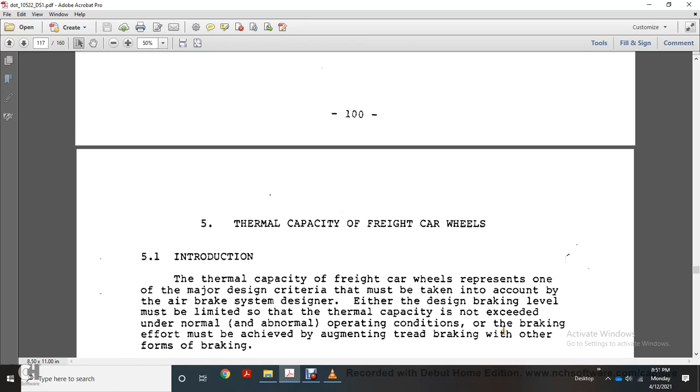Introduction. Thermal capacity of freight car wheels represents one of the major design criteria that must be taken into account in air brake system design. Either the design braking level must be limited so thermal capacity is not exceeded under normal or abnormal operating conditions, or the braking effort must be achieved by augmenting tread braking with other forms of braking. Several attempts have been made, especially within the past 20 years, to determine the actual thermal capacity of the freight car wheel typically found in service in North America.

This research has included experimental or theoretical approaches, with particular branches examining wheel dynamometers and performing various kinds of experiments.

Investigation of thermal capacity of the freight car wheels. The purpose of this section is to discuss the most significant portions of the research activity and present a collective assessment of the thermal capacity of freight car wheels.

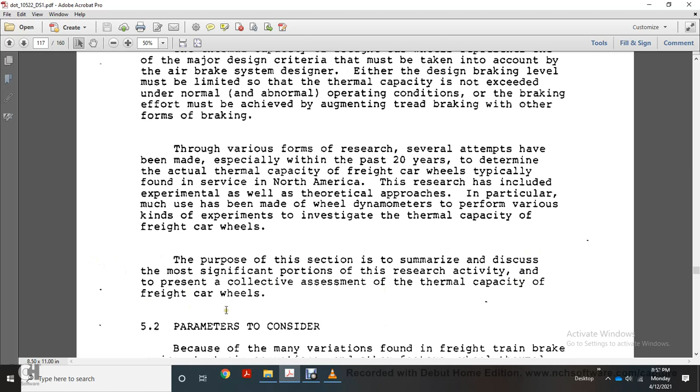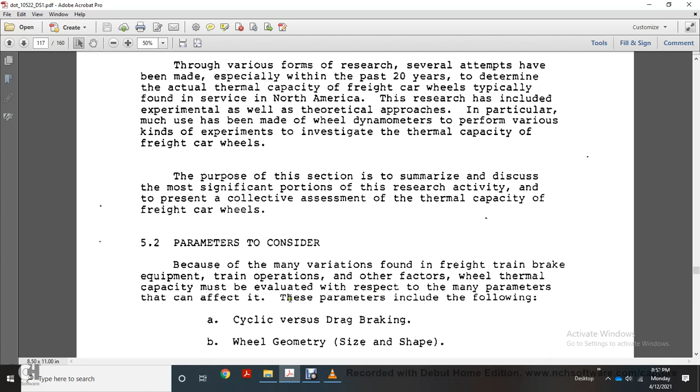Section 5.2: Parameters considered in the performance may vary with the freight train brake equipment, train operation, and other factors. The wheel thermal capacity must be evaluated with respect to many of these parameters. Parameters include the following: cyclic versus drag braking, wheel geometry size and shape, wheel material, heat treatment, and worn versus non-worn versus new wheels, brake shoe material, shoe alignment, and other considerations. Each of these topics is discussed in terms of the research efforts performed in recent years.

Cyclic versus drag braking. The thermal capacity will depend on the type of operation the wheel experiences. One term of cyclic braking is used by enginemen to control train slack action when operating long trains over undulating terrain.

Although brake levels due to this type of braking, also called stretch braking, are normally not large, the wheels are exposed to alternating cycles of heating and cooling.

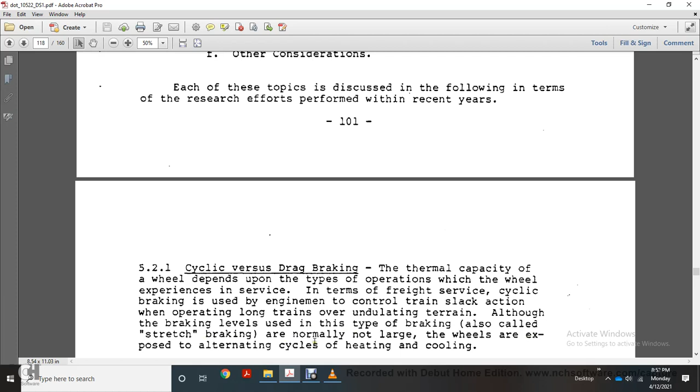Another form of braking that can be considered cyclic is the full service or emergency brake application, used when the engineer needs to produce a large change in train speed.

For example, going from 50 miles per hour to a stop causes the wheel tread temperature to increase to a high value over a short period of time, then drop back to ambient level at a rate determined by ambient conditions.

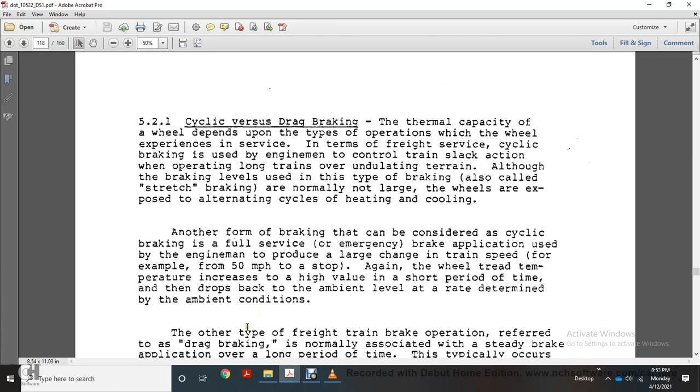The other type of freight train brake operation, referred to as drag braking, is normally associated with a steady brake application over a long period of time. This typically occurs when the train is being operated down a long, steep grade, where the train brakes are applied to balance the gravitational force of the grade.

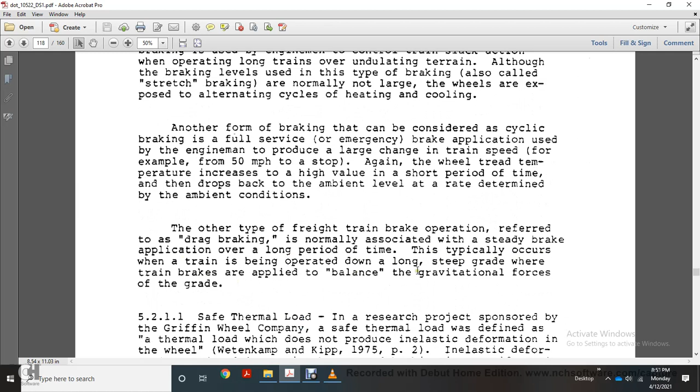5.2.1 Safe Thermal Load. This research project was sponsored by the Griffin Wheel Company. Safe thermal load was defined as the thermal load which does not produce inelastic deformation in the wheel (Wetenkamp and Kipp, 1975, page 2).

Inelastic deformation produced in service because of braking and manifestation of residual stress in the wheel, caused by a large variation of temperature between the wheel tread surface and other portions of the wheel.

This variation of temperature, referred to as thermal gradient, is believed by some investigators to be more significant in causing wheel residual stress than the equivalent or even higher tread temperature sustained for a long period of time.

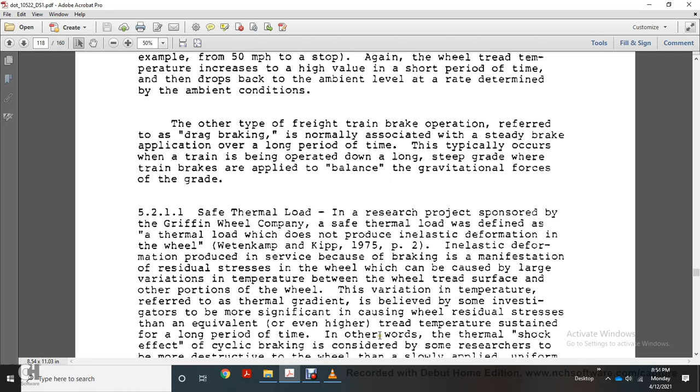In other words, the thermal shock effect of cyclic braking is considered by some researchers to be more destructive to the wheel than the slowly applied uniform high temperature brake application followed by a slow cooling process.

To place the thermal capacity of the wheels in perspective with respect to cyclic and drag braking applications, the braking level of both types of application must be known.

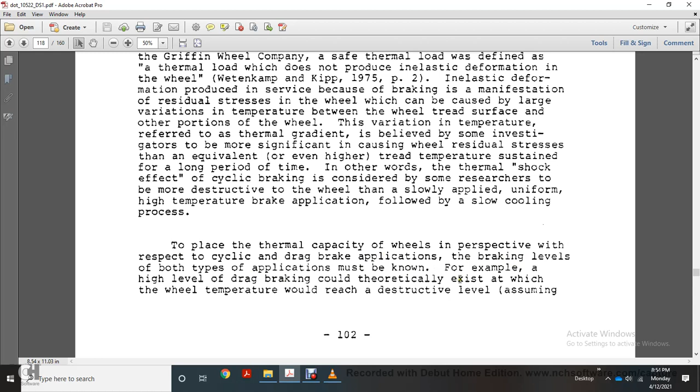For example, a high level of drag braking could theoretically exist in which the high wheel temperature would reach a destructive level—assuming the brake shoes did not disintegrate—and the wheel would fail, with the amount of cyclic braking not being a factor.

5.2.1.2 Recent test methods and tests conducted at the University of Illinois. Several types of wheel braking levels and cycles were investigated using a given wheel diameter. The residual stress of the wheel is measured after subjecting the wheel to various braking levels, by measuring the opening of saw cuts made into the wheel rims after testing.

The results of these tests are shown in Figure 5.1, showing the opening in inches versus the depth of the cut in inches.

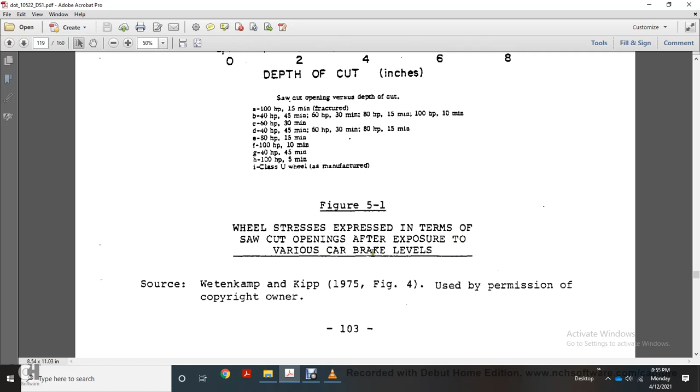Wheel stresses, expressed in terms of the saw cut opening, was examined after exposure to various car brake levels. Researchers reached the following conclusions concerning the results shown in figure 5.1 (Wetenkamp and Kipp, 1975, page 15): starting with the given wheel design and heat treatment, the more severe the braking application, the greater the opening of the wheel upon performing the radial saw cut.

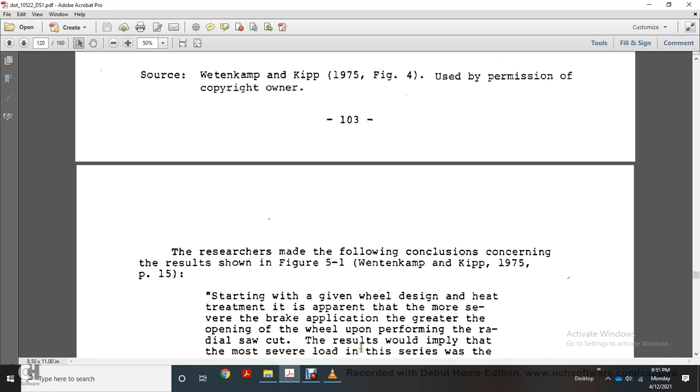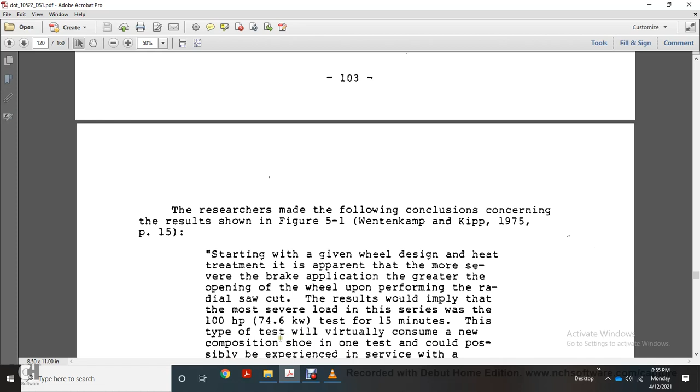The results imply that the most severe load of the series was the 100 horsepower test for 15 minutes, a test type virtually consuming the new composition shoe. This test could possibly represent a stuck brake, a substantially more severe braking cycle, in freight service is difficult to imagine.

The wheel subject to this thermal load fractured during the radial saw cut; the cut progressed through the rim. None of the other wheels fractured upon sawing.

Fortunately, the limited data have a rather well-defined dividing point: thermal loads producing substantially smaller saw cut openings than the wheel that fractured upon sawing should be considered reasonably safe. It should be noted that in the above-mentioned case, the 100 horsepower, 15-minute wheel did not fracture until the saw cut was made.

The tread temperature reached 1,146 degrees Fahrenheit (Wetenkamp and Kipp, 1975, table 1). A new composition brake shoe was consumed during the test.

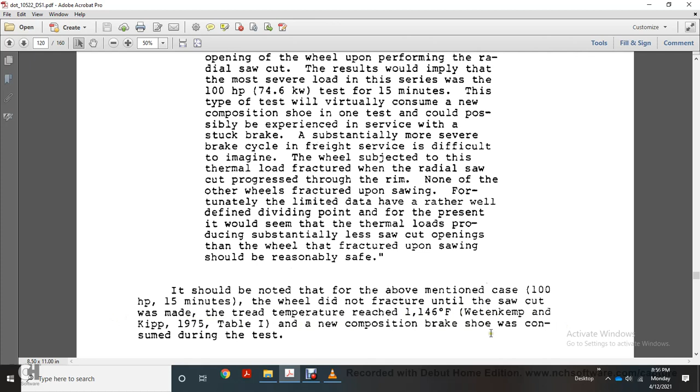How the wheel would withstand the combined physical loads of repeated thermal cycles in actual train operation can only be surmised.

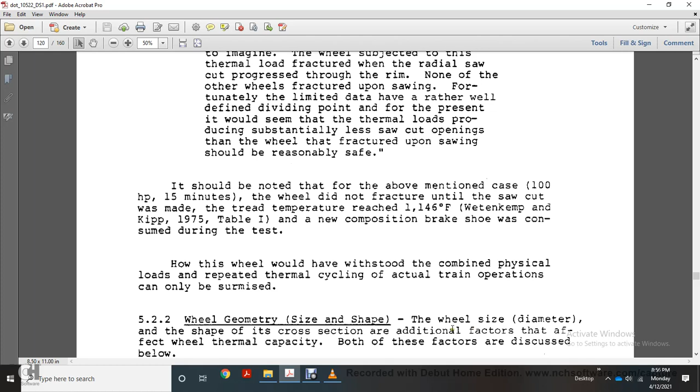Wheel geometry, size, and shape: wheel size, diameter, and the shape of the cross section are additional factors affecting the wheel's thermal capacity. Both of these factors are discussed below.

Research on wheel size was performed by the Westinghouse Air Brake Company using full-scale dual wheel dynamometer investigations, examining the tread temperature produced with various wheel sizes at a given level of horsepower.

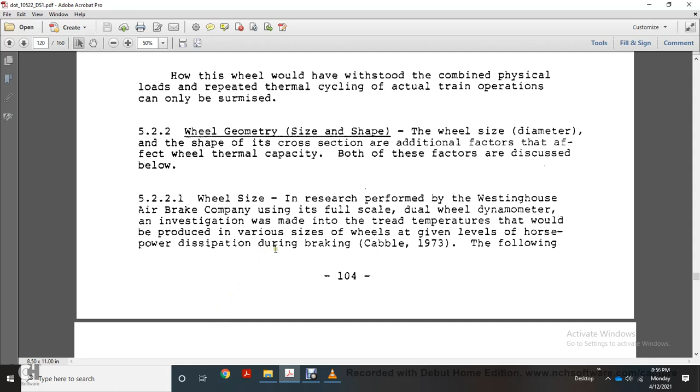Dissipating during braking (Cabble, 1973), the following diameters and types of Class B wrought steel wheels were tested in both new tread and worn tread conditions: 40-inch multi-wear, 36-inch multi-wear, 36 and 3/8-inch multi-wear, 36-inch one-wear, 28-inch multi-wear, and 28-inch one-wear.

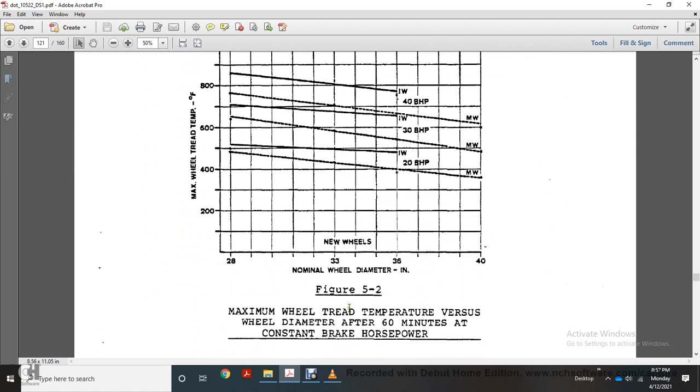Per Cabble, 1972: if the brake horsepower per wheel increased, the temperature arrived at for a given wheel would increase, for the same length of time, as the nominal wheel diameter.

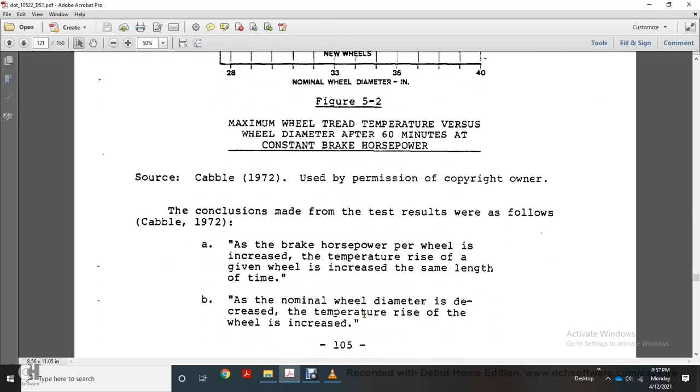If the degree of temperature rise of the wheel increased, as the actual wheel diameter decreased due to wear, the degree of temperature arrived at the wheel will increase. The approximate relationship of temperature rise versus nominal wheel diameter is approximately a straight line.

The maximum wheel tread temperature that a wheel can withstand without problems can be used to determine the allowable brake horsepower for the wheel, and therefore the grade braking operation.

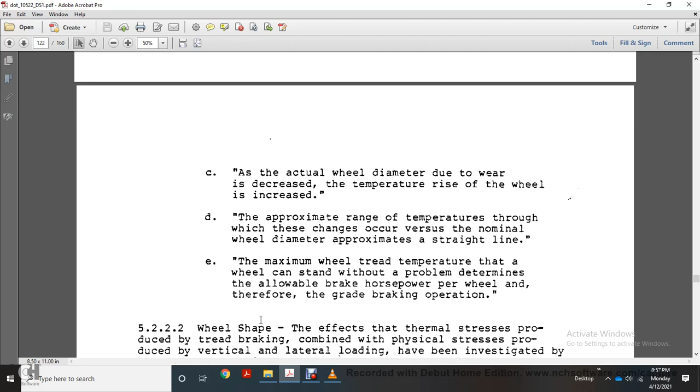Wheel shape effects, the thermal stresses produced by tread braking, combined with the physical stresses produced by vertical and lateral loading, have been investigated by performing analytical stress analysis (Novak et al., 1975). This research was performed in part to explain the difference in wheel plate service failures between 28-inch wheels with straight and curved cross sections.

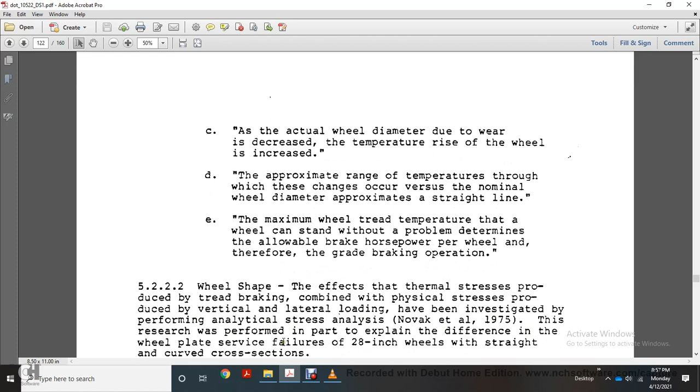Using two-dimensional finite difference and finite element mathematical methods for calculating the octahedral shear stress, the 28-inch straight plate (B28) and curved plate (CB28) wheels were evaluated under service load application for vertical and lateral wheel loads, flange throat, and a combination with emergency brake application.

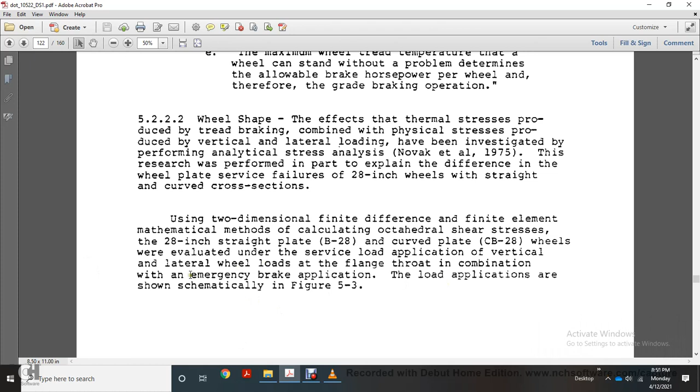Surface loads applied were as follows: car wheel rail contact loading, vertical 46,100 pounds, lateral 20,000 pounds; tread brake loading, brake shoe force 6,200 pounds, tractive force 720 pounds.

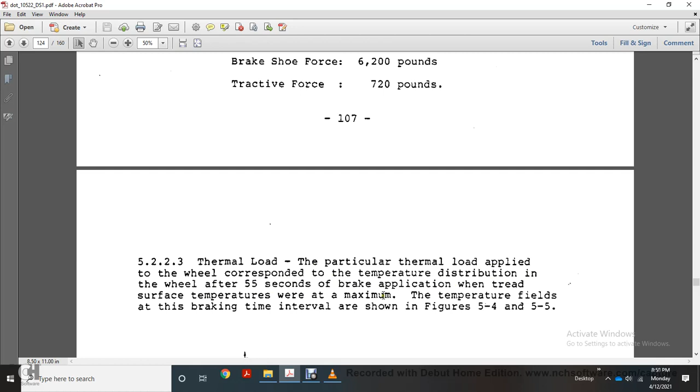The particular thermal load applied to the wheel corresponded to the temperature distribution in the wheel after 55 seconds of brake application when tread surface temperatures were at a maximum. of the temperature field during braking at this time interval, is shown in figures 5.4 and 5.5: straight plate wheel thermal loading in figure 5.4, and curved plate wheel thermal loading in figure 5.5.

Novak et al., 1975, used by permission of the copyright owner.

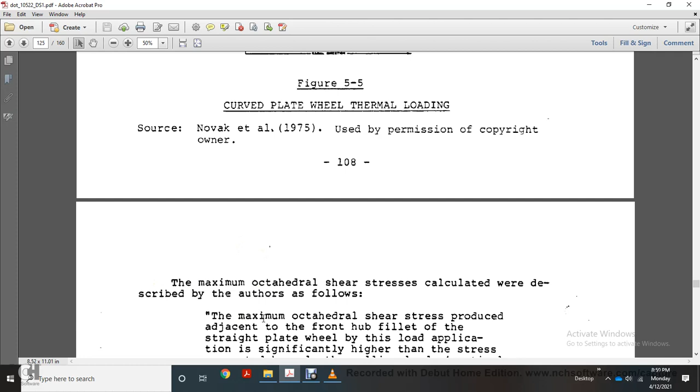Maximum octahedral shear stress is calculated as described by the authors as follows. The maximum octahedral shear stress produced at the front hub fillet of the straight plate wheel by this load application is significantly higher than stress generated by rolling loads, vertical and lateral wheel loads alone. This maximum stress occurred at approximately 45 degrees of wheel rotation.

As the wheel rotated to 180 degrees, the maximum octahedral stress intensity was about 13,500 psi near the back of the rim fillet. This also occurred after 45 degrees of wheel rotation and diminished as the wheel traveled further, reaching 180 degrees.

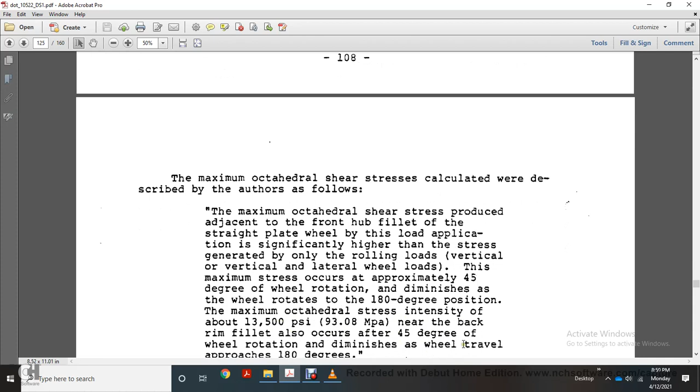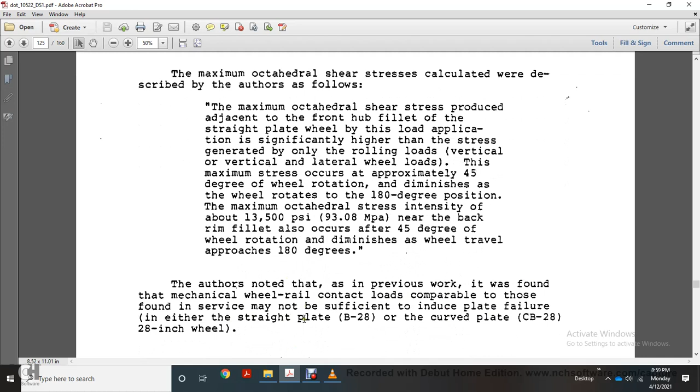The author noted that previous work has found that mechanical wheel-rail contact loads comparable to those found in service may not be sufficient to induce plate failure within either the straight plate B28 wheel or the curved plate CB28, 28-inch wheel.

The authors continued that the introduction of thermal and mechanical loads produced by emergency braking, combined with mechanical rolling loads, produced considerably higher octahedral shear stress levels in the plate section of the B28 design compared with the CB28 design. This would indicate the B28-inch wheel could develop a greater number of plate failures than the CB28.

This depends on the number of braking cycles, including during normal service operation, since both wheel designs are subjected to essentially the same service conditions. If plate failures have occurred, they are most likely with the B28 design, while the CB28 plates remain below the stress threshold necessary to initiate fatigue failures.

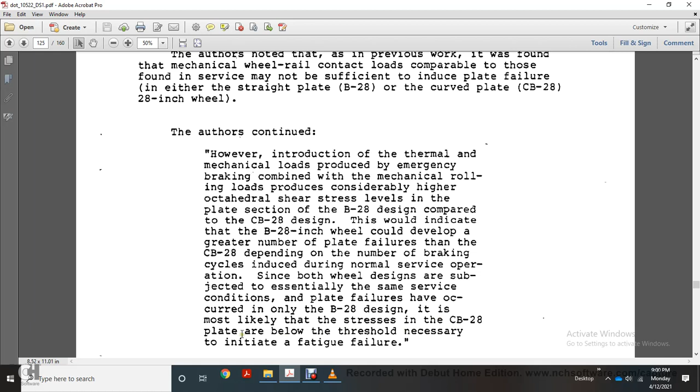5.2.3, wheel type. There are several types of wheels used in the railroad industry today, varying in material, manufacturing method, and design.

Presently, both wrought steel and cast steel wheels are approved for new car construction. Cast iron wheels are prohibited in interchange service after January 1st, 1970.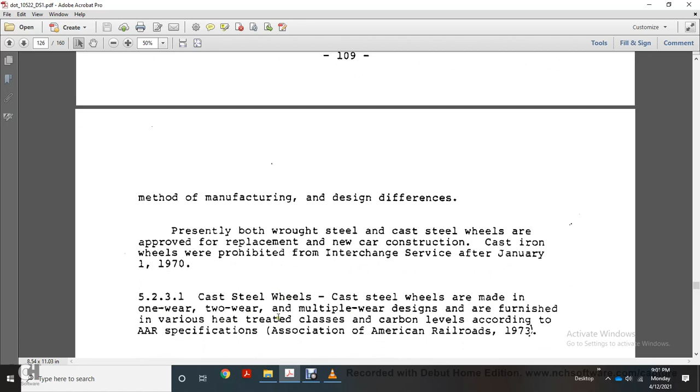5.2.3.1, cast steel wheels. Cast steel wheels are made in one-wear, two-wear, and multi-wear designs, furnished in various heat-treated classes and carbon levels according to the Association of American Railroads specification.

1973. Cast steel wheels are permitted to cool in their molds with complete solidification of the wheel before being removed from the mold.

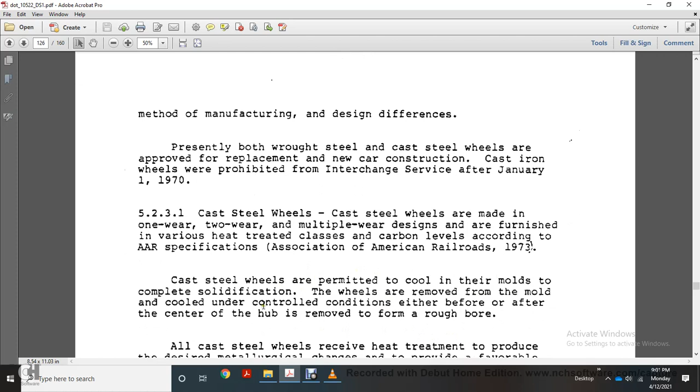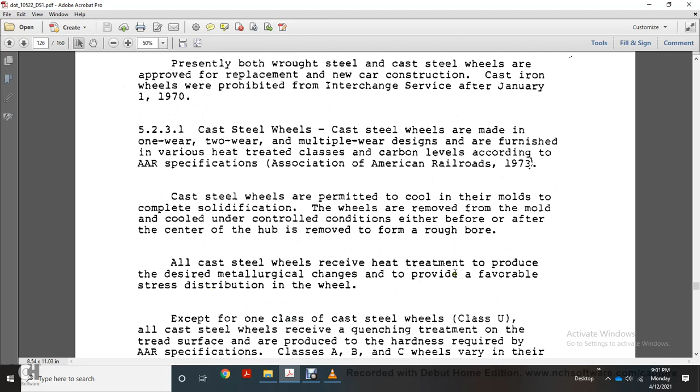Cooling occurs under controlled conditions, either before or after the center of the hub is removed to form a rough bore. All cast steel wheels receive heat treatment to produce the desired metallurgical change, providing a favorable stress distribution in the wheel.

Except for one class of cast steel wheels, Class U, all cast steel wheels receive a quenching treatment on the tread surface that produces the hardness required by the AAR specification.

Class A, B, and C wheels vary in their carbon content and hardness.

Wrought steel wheels are made by successive hammering and squeezing operations on hot steel blocks. After final shaping of the wheels, they are control-cooled.

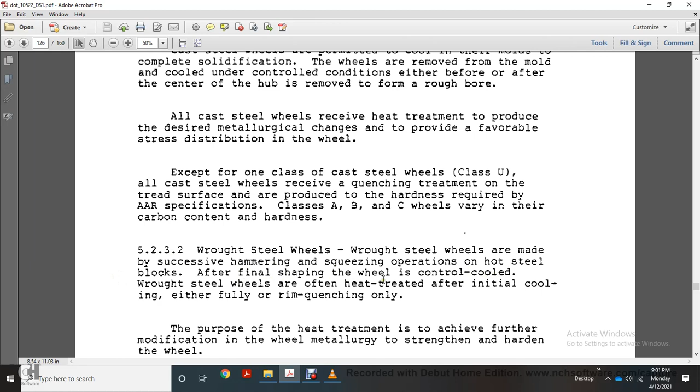Wrought steel wheels are often heat treated after initial cooling, either fully or with rim quenching only. Proper heat treatment achieves further modification of the wheel metallurgy, strengthening and hardening the wheel.

5.2.3.3, AAR specification governing wheel manufacture.

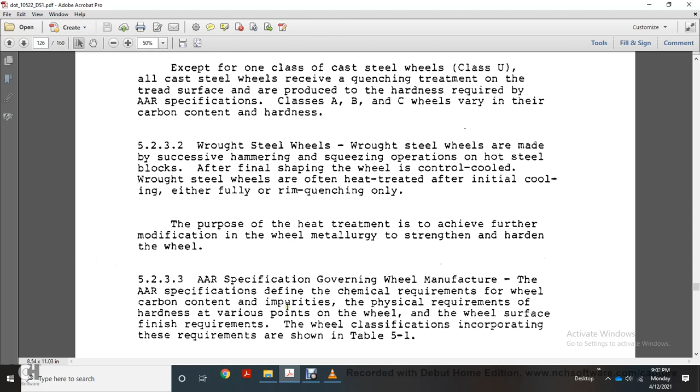The AAR specification defines the chemical requirements of the wheel for carbon content and impurities, the physical requirements of hardness at various points on the wheel, and the wheel surface finish requirements of the wheel classification, incorporating the requirements shown in Table 5.1.

Class U, untreated, minimum carbon content 0.65, maximum 0.80, for general service use wherever untreated wheels are satisfactory. Class U1, untreated, 0.95 minimum to 1.2.

For high speed service use with severe braking conditions but moderate wheel loads: Class A, treated, 0.47 to 0.57; Class B, treated, 0.57 to 0.67, for high speed service with moderate braking conditions and heavier wheel loads.

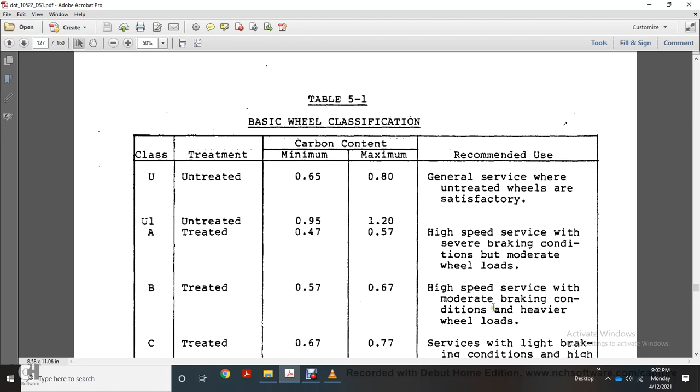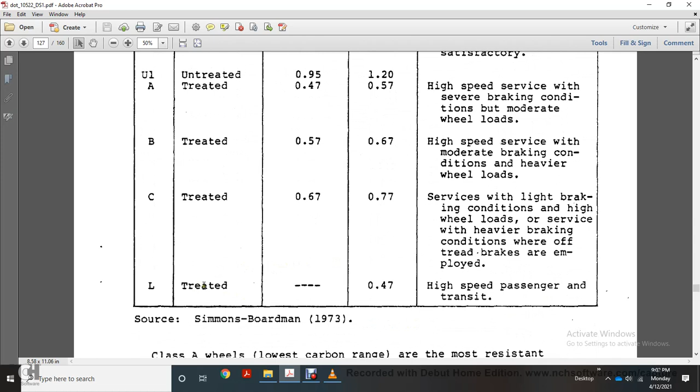Class C, treated, 0.67 to 0.77, for light brake conditions and high wheel loads, or service, or heavier brake conditions where off tread brakes are employed. Class L, treated, 0.47, for high speed passenger transit.

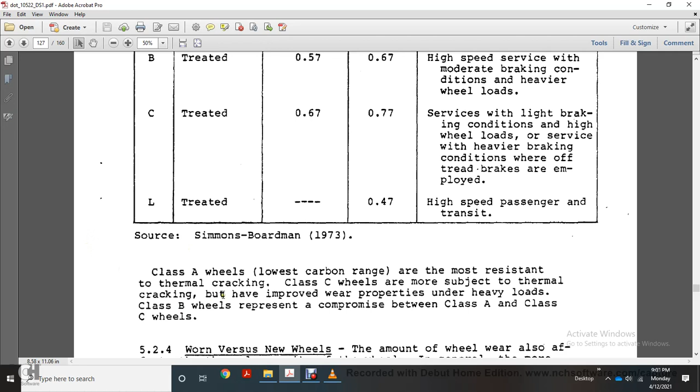Class A's low carbon range makes it most resistant to thermal cracking. Class C wheels are more subject to thermal cracking but have improved wear properties under heavy loads. Class B wheels represent a compromise between Class A and Class C wheels.

Worn versus new wheel: the amount of wheel wear also affects the thermal capacity of the wheel. In general, more worn wheels result in higher tread temperatures due to lower thermal capacity at a given level of braking, and this is especially true for small diameter wheels.

In tests of performance by Westinghouse Air Brake Company, wheels subjected to a constant brake horsepower level for long periods of time, up to 60 minutes, Figure 5.6 compares the temperature versus time curve of new wheels with worn wheels in these tests.

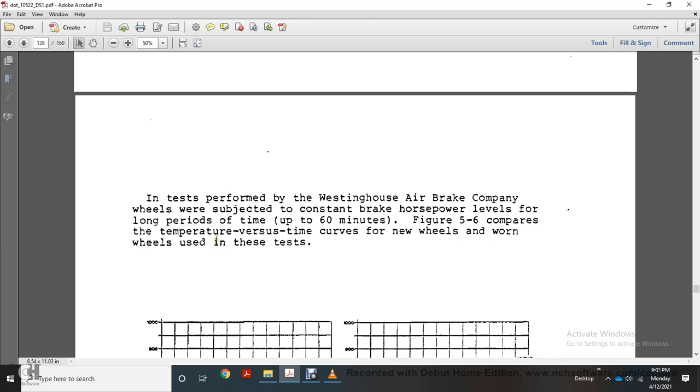The maximum tread temperature reached for 40 BHP was approximately 600 degrees Fahrenheit with the new wheel, versus approximately 720 degrees Fahrenheit with the worn wheel, an increase of 120 degrees for the worn wheel compared to the new wheel. These high temperature effects with worn wheels are even more apparent with small diameter wheels.

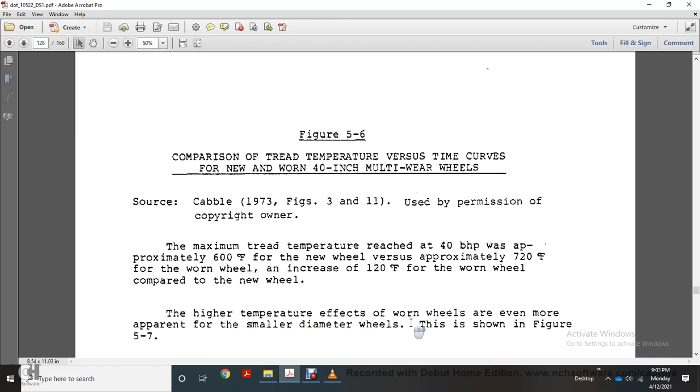This is shown in figure 5.7, a comparison of tread temperature versus new and worn 28 multi-wear wheels. The maximum tread temperature after 60 minutes with 40 bhp was approximately 760 degrees Fahrenheit with the new 28 wheel, versus approximately 950 degrees Fahrenheit with the worn wheel, an increase of 190 degrees Fahrenheit with the worn wheel compared to the new wheel.

Closely related is the amount of wheel wear and its effect upon maximum tread temperature by wear category, multi-wear versus one-wear wheels. This effect can be seen in figure 5.8, a summary of test results showing the maximum temperature reached by wear category of the wheels tested.

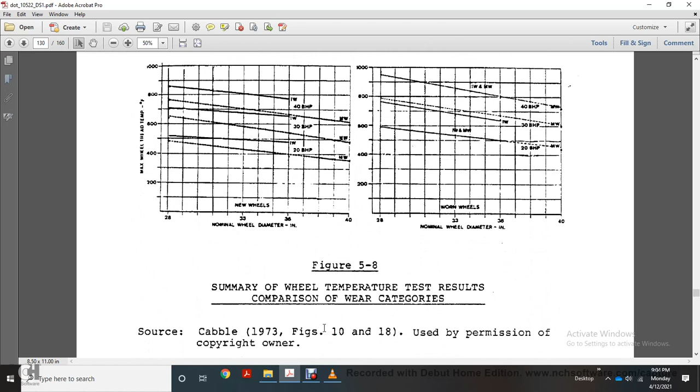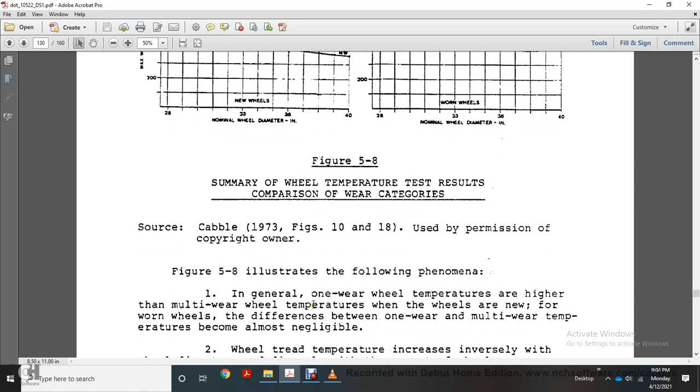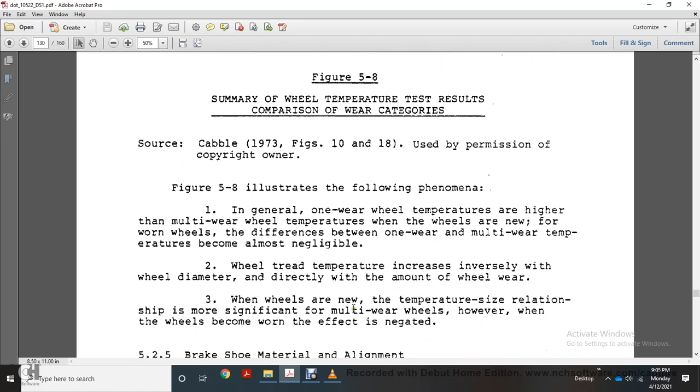Summary of the wheel temperature test results comparing wear categories: First, in general, wheel temperature is higher for the one-wear wheel than for the multi-wear wheel when the wheels are new. For the worn wheel, the difference between one-wear and multi-wear temperature becomes almost negligible. Second, wheel tread temperature increases inversely with wheel diameter and directly with the amount of wheel wear. Third, when wheels are new, the temperature-size relationship is more significant for multi-wear wheels; however, when the wheels become worn, the effect is negated.

Regarding brake shoe material alignment: up until about 1969, almost all wheel thermal capacity tests were performed using cast iron brake shoes held in a clasp arrangement. The Weaver 1969 report, published in ASME, documented the testing of Class C wheel thermal capacity using composition Cobra brake shoes. The report briefly documented earlier tests performed at the University of Illinois.

The 1950 stop tests simulated a rapid deceleration rate at 115 miles an hour. A simulated wheel load of 20,000 pounds was used in conjunction with a brake shoe force of 20,000 pounds, each of the two cast iron brake shoes held in a clasp arrangement. The braking duty represented total kinetic energy of 9 million foot-pounds per stop.

Results of the test, as summarized by the authors: of 5 Class C R wheels tested, (Class C rimtreated), three developed thermal cracks after 1 stop. The remaining 2 wheels developed cracks after 5 and 7 stops, respectively.

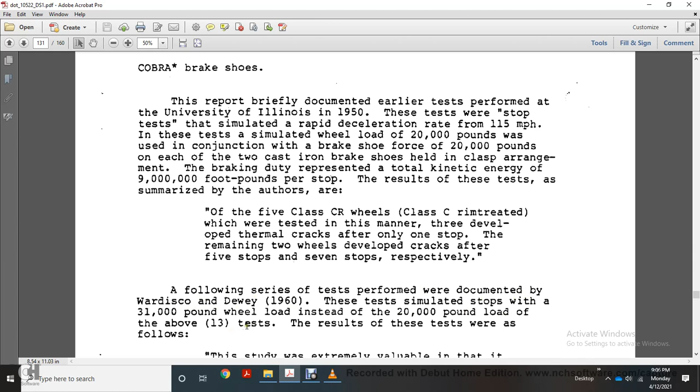Following this, series of tests were performed and documented by Wardisco and Dewey in 1960, simulating stops with a 31,000 pound wheel load instead of the 20,000 pound load used in the prior 13 tests. The results of the tests were as follows.

The study was extremely valuable in that it resulted in a better understanding of the mechanism and theories of formation of the defects developing in wheels. As a result of the braking heat, one particularly notable result of the test supported the result obtained in 1950 at the University of Illinois: the average number of stops required to produce a thermal crack on the CR wheels was 1 stop.

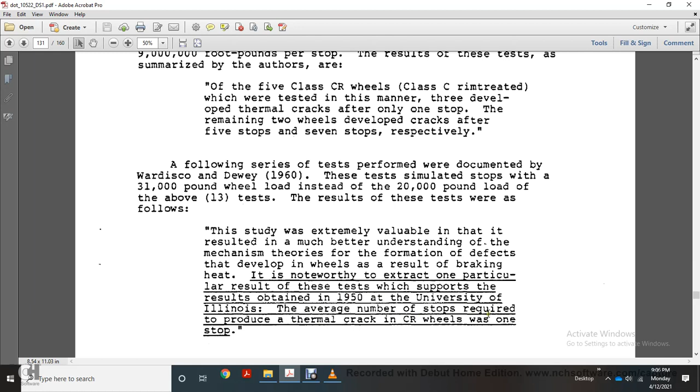In 1968, another test was conducted to obtain a direct comparison of wheel thermal capacity between wheels braked with single flange Cobra composition brake shoes and wheels braked with cast iron shoes. A secondary purpose was to verify the previous test results for the cast metal shoes.

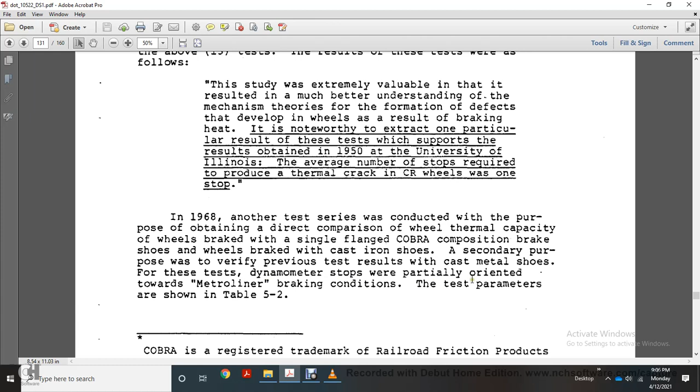For the test, dynamometer stops were partially oriented towards Metroliner braking conditions. The test parameters are shown in Table 5.2, comparing test parameters for cast iron versus Cobra brake shoes.

Test results summarized by the authors: after approximately 20 emergency stops were completed, wheel number 8925 with metal brake shoes began to develop a hairline, skin-deep thermal crack, with the crack becoming more pronounced with each successive stop.

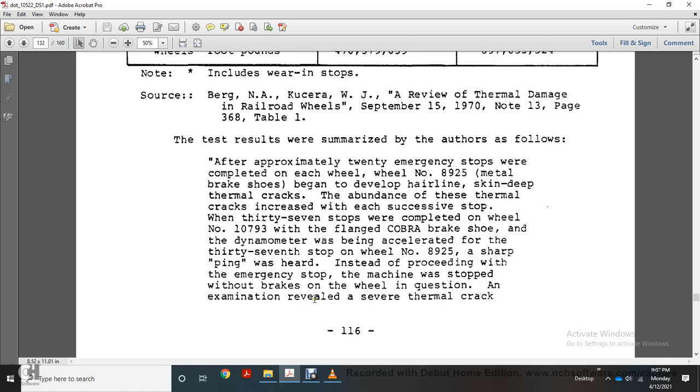Within 37 stops completed on wheel number 10793 with the flange Cobra brake shoe, the dynamometer was being accelerated for the 37th stop on wheel number 8925 when a sharp ping was heard. Instead of proceeding with the emergency stop, the machine was stopped without the brakes applied to the wheel. Examination revealed a severe thermal crack extending almost across the complete width of the tread of the wheel. Testing of wheel number 8925 was discontinued at this point.

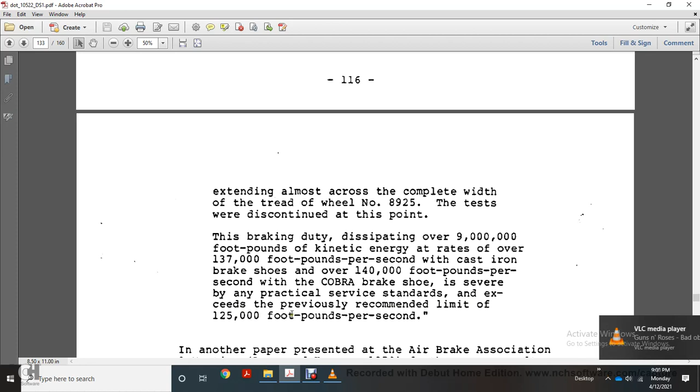The braking duty, dissipating over 9 million foot-pounds of kinetic energy, occurred at rates over 137,000 foot-pounds per second with cast iron brake shoes, and over 140,000 foot-pounds per second with Cobra brake shoes, is severe by any practical service standards and exceeding the previously recommended limit of 125,000 foot-pounds per second.

Another paper presented at the Air Brake Association annual meeting, by Berg and Kucera in 1970, with further test results of the document, led to the following conclusions.

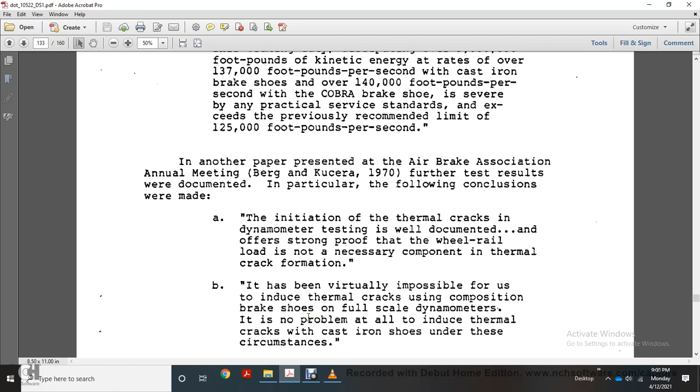It's no problem at all to induce thermal cracks with the cast iron shoes. Under these circumstances, the thermal crack, once formed, can be propagated on the dynamometer using either type brake shoe.

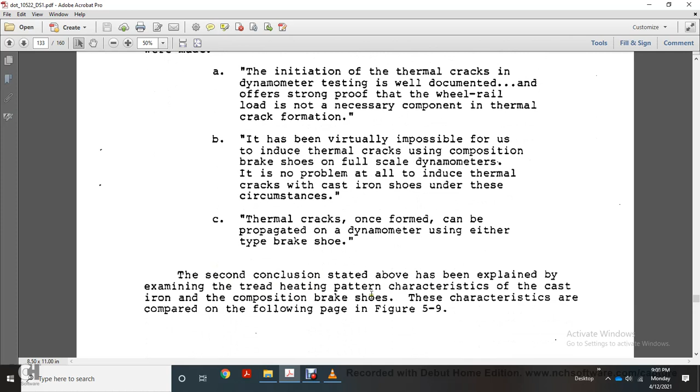Second, this is explained by examining the tread heating pattern of the tread with cast iron versus composition brake shoes. The characteristics are compared in the following page, in paragraph figure 5.9.

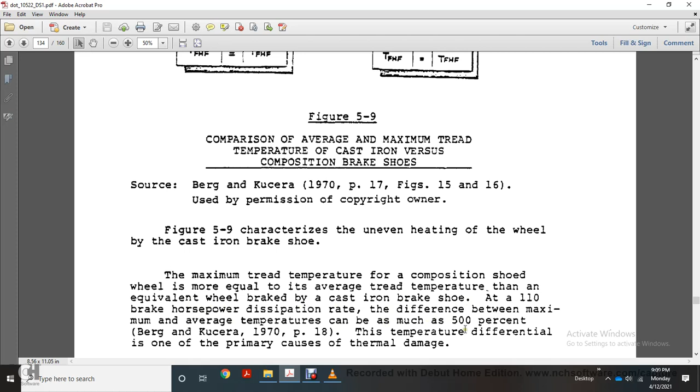The difference between maximum and average temperature can be as much as 500%. This temperature differential is a primary cause of thermal damage. Brake shoe misalignment is also known to affect the effective thermal capacity of the wheel.

Referencing Berg and Kucera 1970, the following statement is made regarding brake shoe alignment, page 95.

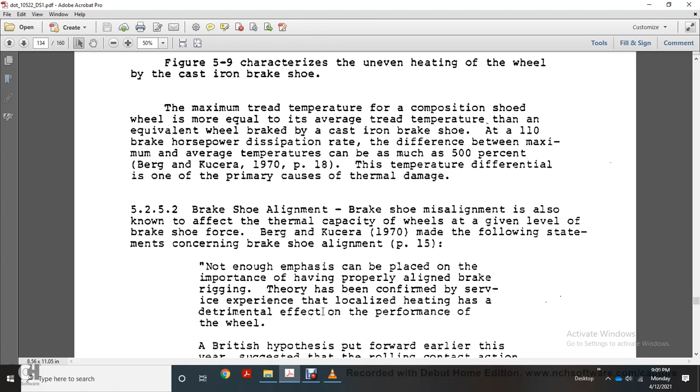This theory has been confirmed by service experience. Localized heating has a detrimental effect on the performance of the wheel.

The British have put forward earlier in the year the suggestion that rolling contact action of the wheel on the rail produces a beneficial surface of residual compression stresses against thermal cracks. They claim it cannot cause brittle fracture until it penetrates this layer.

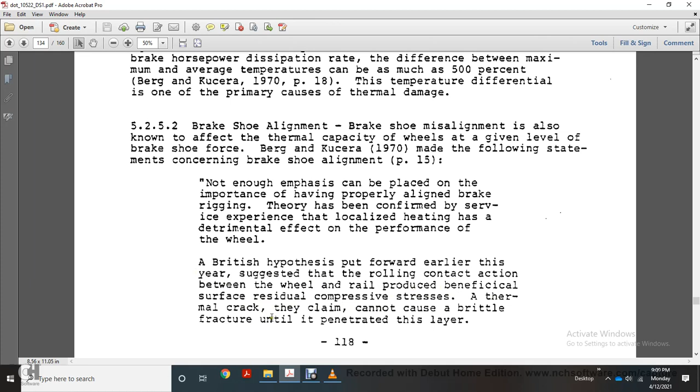Therefore, they say the brake shoe must not be allowed to wander over the face of the rim, lest it initiate a thermal crack in the area unprotected by preceding rolling contact. It is for this same reason that British railroads have abandoned the use of flanged shoes except for slow speed vehicles.

Other considerations. Several other considerations must be investigated to estimate wheel thermal capacity; we briefly discuss the following.

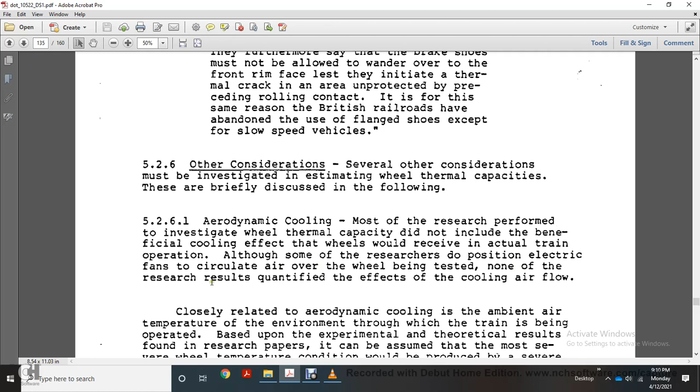Although some research positioned electrical fans to circulate air over the wheel being tested, none of the research resolved or quantified the cooling effects of the airflow.

Closely related to aerodynamic cooling is the ambient air temperature of the environment through which the train is operating, based upon experimental and theoretical results found in research papers.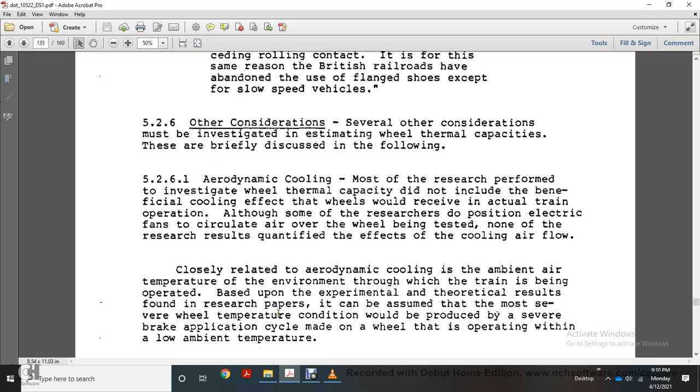It can be assumed that the most severe wheel temperature conditions would be produced by a severe brake application cycle made on a wheel operating within a low ambient temperature.

Section 5.2.6.2, variation in brake force. Although the brake system was designed to produce uniform brake level on all wheels of the car, experience indicates this is not always the case because of binding or misapplied brake shoes.

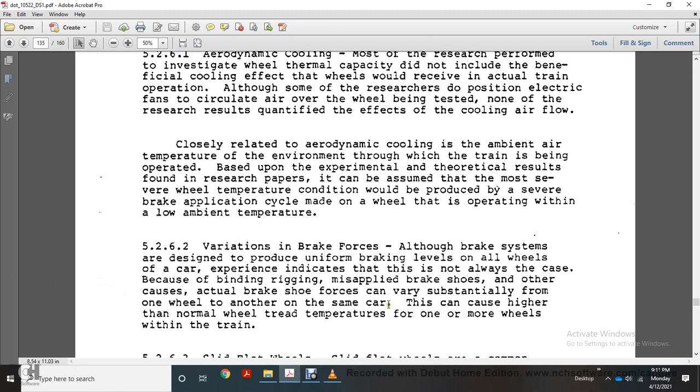Other causes mean actual brake shoe force can vary substantially from one wheel to another on the same car. This can cause higher than normal wheel tread temperature for one or more wheels within the train.

Slid flat wheels. Slid flat wheels are a common problem with present train brake systems. It is rare that a freight train can be observed passing without at least one pair with slid flat wheels to some degree, and other slid flats can be caused by unreleased hand brakes or misapplied brake shoes.

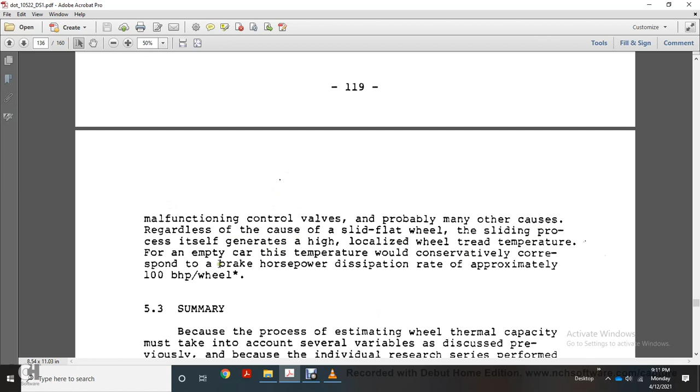The sliding process itself generates a high localized wheel tread temperature. For an empty car, the temperature would conservatively correspond to a brake horsepower dissipation rate of approximately 100 brake horsepower per wheel summary.

In summary, the process of estimating wheel thermal capacity must take into account several variables discussed previously through individual research observed in a series of performed tests. The difficulty lies in providing a collective assessment of the thermal capacity of the freight car wheel subject to tread braking. However, a summary can be made regarding the nature of braking technology, operation, and practice that return the most benefits from braking while simultaneously maintaining safe thermal loading.

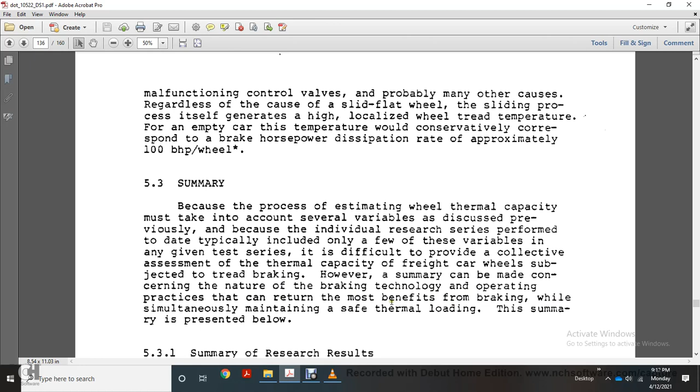The summary is presented below. Some research results: type of brake shoes, research has shown that composition brake shoes produce lower wheel temperature gradients at equivalent horsepower dissipation rates than cast iron shoes, for two reasons which have been put forth to explain this result.

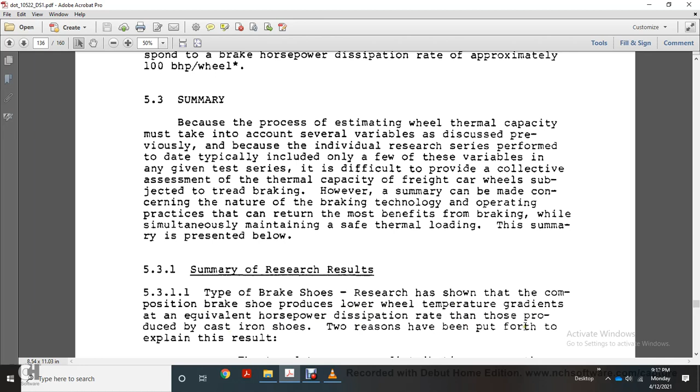The tread temperature distribution across the tread in the axle direction is most uniform with the composition brake shoe, while the cast iron shoe tends to form rings or bands of extremely high temperature on the tread, which are local hotspots. The more uniform temperature distribution produced by the composition brake shoe is due to the smaller temperature gradient in the radial direction, resulting in lower wheel stresses.

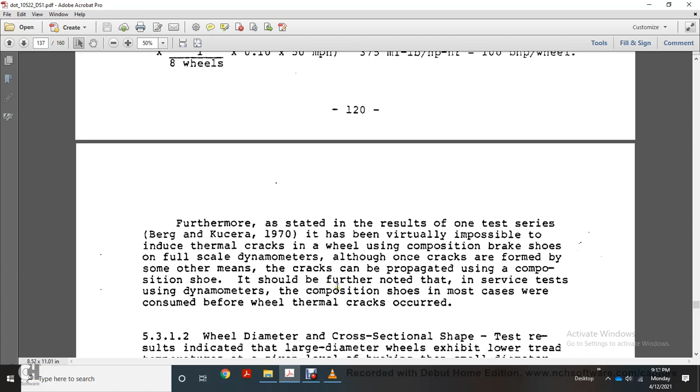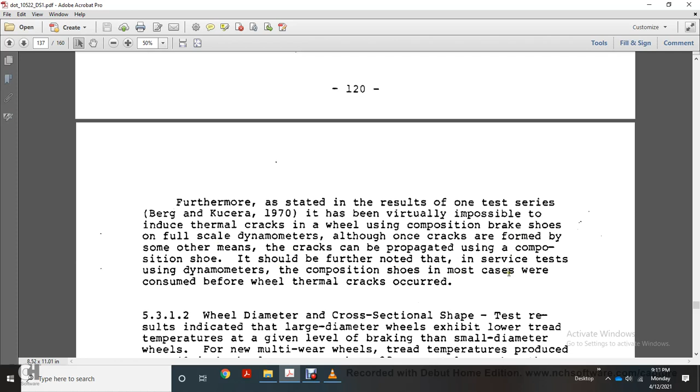Regarding wheel diameter and cross-sectional shape, test results indicate a large diameter wheel exhibits lower tread temperature at a given level of braking. The small diameter wheel, a new unworn wheel tread temperature produced at a 40-inch wheel with wear is 25% lower than the temperature produced at a 28-inch wheel.

Although this effect was not seen at the worn wheel, theoretical analysis of the 28-inch wheel indicated that under combined physical and thermal loads, a curved plate 28-inch wheel exhibited substantially reduced wheel stress compared with straight plate wheels. This result was substantiated by the fact that wheel plate failures for the selected freight train operation occurred exclusively with straight plate wheels.

5.3.1.3 type of brake rigging avoids extreme variation of the brake level on individual wheels of the freight car. Brake rigging must be capable of providing a uniform, balanced brake shoe force on each wheel. It is also important in the selection of brake rigging to provide proper brake shoe alignment.

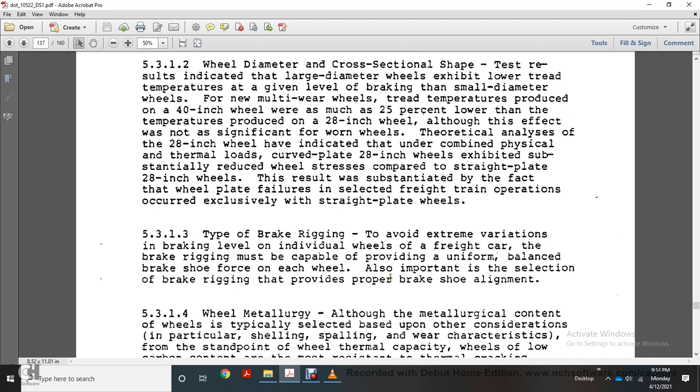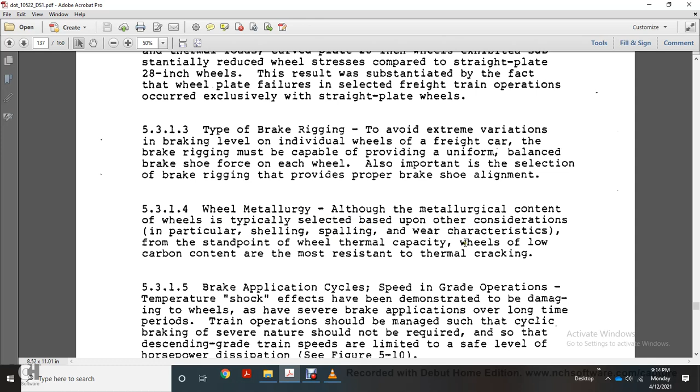Regarding wheel metallurgy, although metallurgy is typically selected based on considerations such as shelling and spalling, from the standpoint of wheel thermal capacity, wheels with low carbon content are most resistant to thermal cracking. Brake application cycles, speed in grade operations, temperature, and shock effects have all been demonstrated to cause damage within the wheel if subjected to severe brake application over a long time period.

Train operation should be managed such that severe cyclic braking is avoided, so that descending grade train speeds are limited to a safe level of horsepower dissipation. See Figure 5-10, Safe Energy Dissipation Rate.

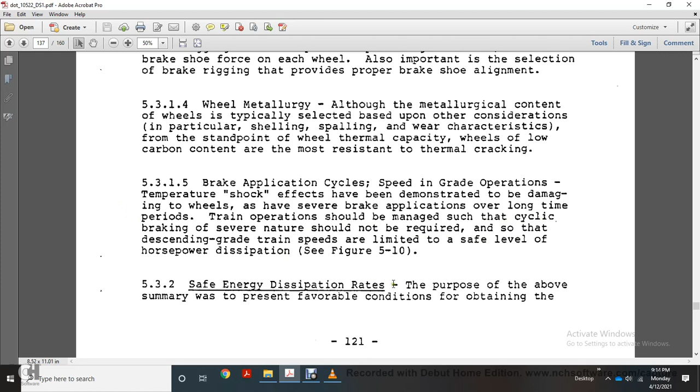The purpose of the above summary was to present favorable conditions to be obtained for the freight car wheel using tread braking techniques. Safe energy dissipation for the freight car wheel was tentatively determined for the 33-inch Class U wheel.

This work was done by Bennett, Wetenkamp, and Kipp in 1975. Research was performed at the University of Illinois, sponsored by Griffin Wheel Company. The tentative safe energy dissipation versus time curve shown in Figure 5-11 should be noted, as the results do not include physical mechanical wheel loads that would be experienced in service.

Safe energy, or the tentative safe energy dissipation rate curve, asymptotically approaches the 40 BHP level over time, substantially greater than 40 BHP for only a short time period.

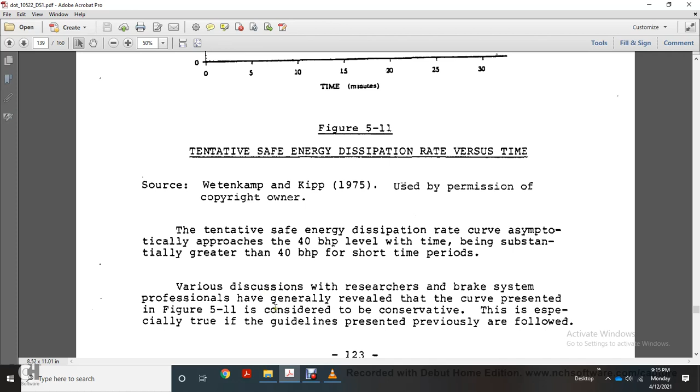Various discussions with researchers and brake system professionals have generally revealed the curve presented in Figure 5-11 to be conservative. This is especially true with the guidelines presented previously, or in the appendix, which includes the glossary of terms.

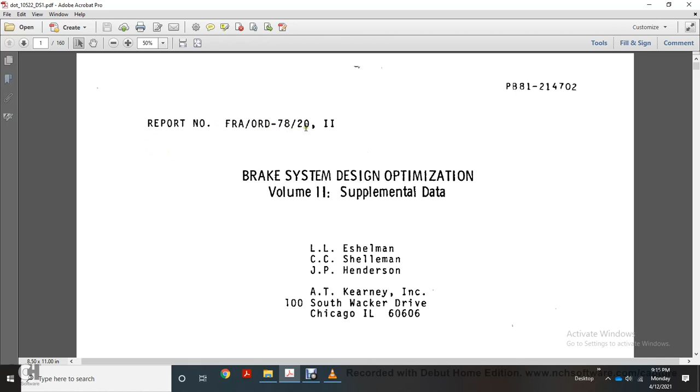This concludes the Brake System Design Optimization, Volume 2, Supplemental Data Report, Report Number FRA-ORD 78-20, April 1981, Final Report.